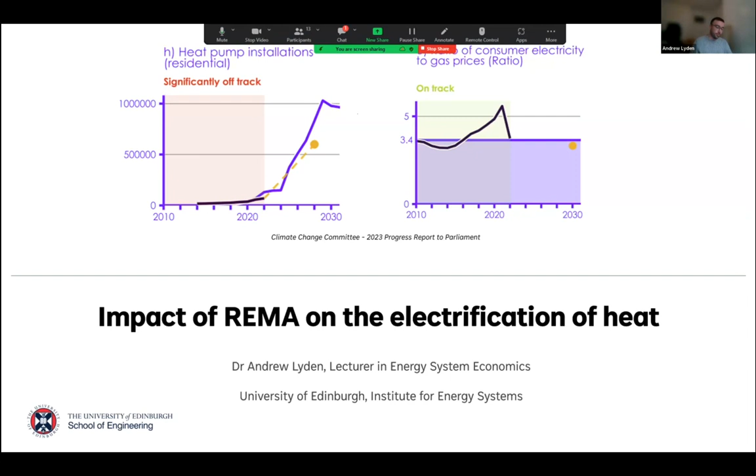So the ratio is back on track, but you can see that it could easily go off track again if government policy changes again. So this is kind of where we're at in terms of heat pump installations and electricity prices to gas, and how we can assess the rollout of heat pumps in terms of those things. I just wanted to also introduce the team as well.

So this was a project which had many different partners, and it was quite a nice experience because it was partners that hadn't worked together before as well. So it gave me an opportunity to hire a postdoc who did a lot of energy system modelling, and we had 3 co-Is from different universities.

So Stephen Watson at Loughborough University has done lots of interesting things around heat pump demand estimation. Rinaldi at Cranfield brought lots of expertise in modelling thermal systems, optimisation, understanding of that engineering policy border. And Peter Connor at Exeter University brought lots of expertise in national and local policy related to energy.

It was good to have this team together to try and start to tackle the overarching challenges that we identified in this project, which as I said, was all about the impact of REMA on electrification of heat. And so the aim was to investigate the impact of these reforms on electrification of heat, and that's really the rollout of heat pumps.

So we wanted to look at REMA and see what reforms in there might have the highest impact on the electrification of heat. Another objective was to look at different scenarios of electrification of heat, which have already been developed. We wanted to enhance the modelling capabilities of the open source power system model we have already. We wanted to be able to model these identified reforms so that we could come up with a quantification of the impact of the different electricity market reforms on the rollout of heat, and think a bit about energy policy as well.

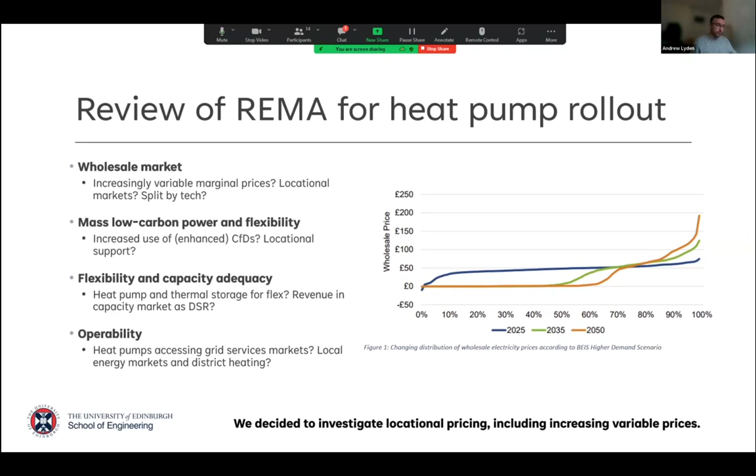Are there going to be new markets that enable this, for heat pumps to access emerging things like local energy markets and district heating, where you have larger scale heat pumps? We decided to investigate locational pricing. It was one that's fiercely debated, as I said, and it's also quite interesting in terms of the impact that it has on increasingly variable prices.

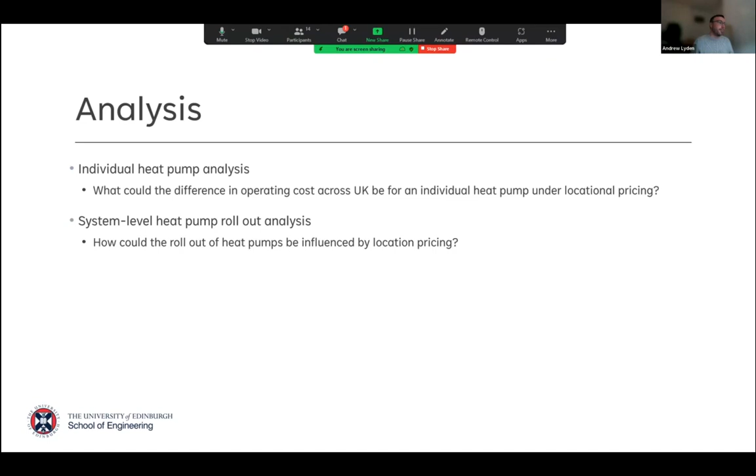So in the analysis that we carried out, we first of all looked at an individual heat pump. We looked at what would be the difference in operating costs for that individual heat pump across the UK under locational pricing versus the current status of a unified price. And then we did similar for the system level heat pump rollout as well. So we looked at, if we aggregate all the heat pumps into the different zones, what whole system impact would locational pricing have on the whole system cost.

So the first section was just individual heat pump analysis, and this gives an overview of the methods and data that we used. So we used this model, PyPSA-GB, which is an open source model for simulating historical years and future years, and it can do either unified pricing or locational pricing. As part of this project, I added the ability to do more of the locational pricing. Basically we split the country up into different zones, and we can have different prices in these zones depending on the demand, the generation, and the network connection between the zones. And this outputs wholesale prices for us.

And then we have a number of other models that we can use for things like calculating the COP of a heat pump or the heat demand of a single detached house. And then we use the Octopus Agile tariff calculation to convert this wholesale price into a retail tariff that we assume is representative of what a heat pump operator, a domestic consumer basically, would actually pay for the electricity being consumed by the heat pump.

So with this retail tariff, heat demand and COP, we can look at the different zones and calculate an individual heat pump operating cost, both under unified pricing and locational pricing. And we chose to look at the years 2020 and 2035.

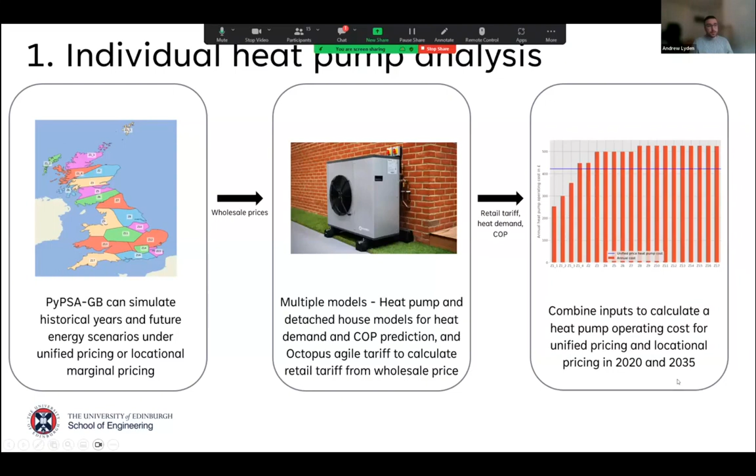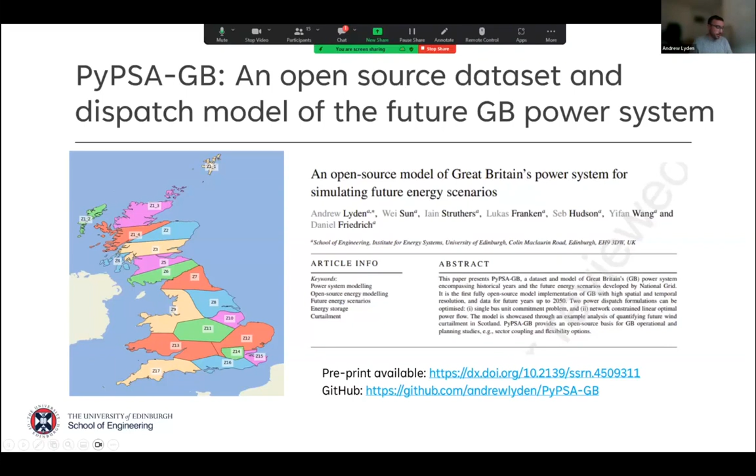So a bit more on the PyPSA-GB: it's an open source data set and dispatch model for future GB power systems. We have a preprint that's available so people can use the model. It's on GitHub. You can read about the model and see what data is out there. So do let me know if you're interested in this or have a look yourself. We've used it for other applications as well.

It was originally developed to look at seasonal thermal energy storage and how to integrate that into the wider energy system. But it's also been used for things like security of supply in Scotland and carbon impacts of increased marine generation. But for this project, we used it to develop these time series of pricing, basically, of tariffs.

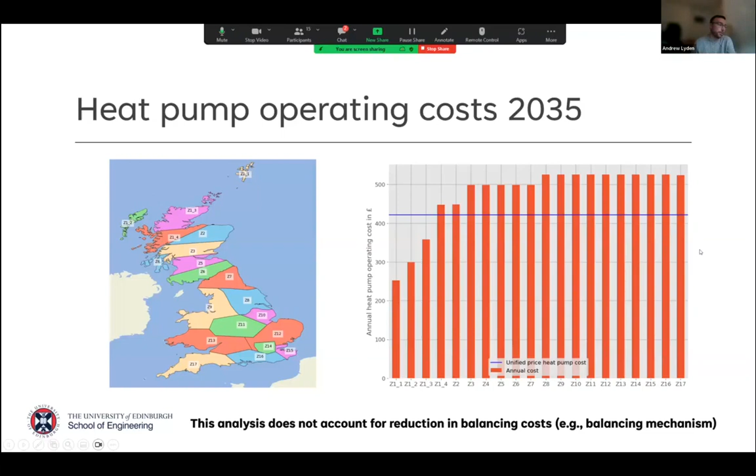So now we're seeing that the zonal pricing overall has a kind of increasing cost for individual heat pumps. And then the second part of our analysis looked at system level. So we looked at the whole rollout. We used National Grid's Future Energy Scenarios for projections in terms of where heat pumps might be and how many installations there would be for each of the zones.

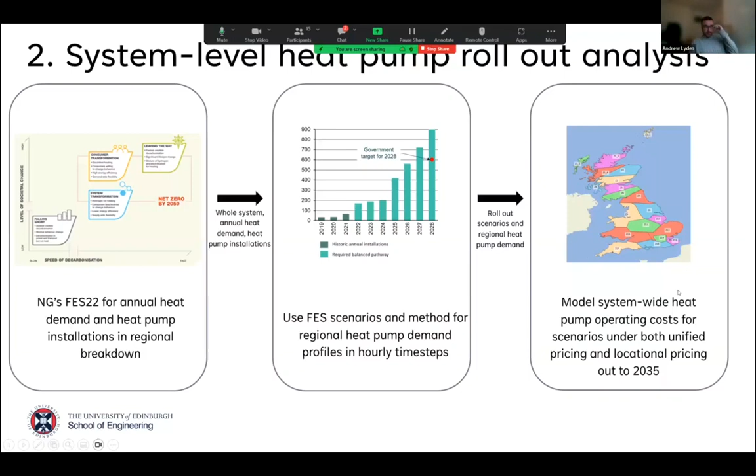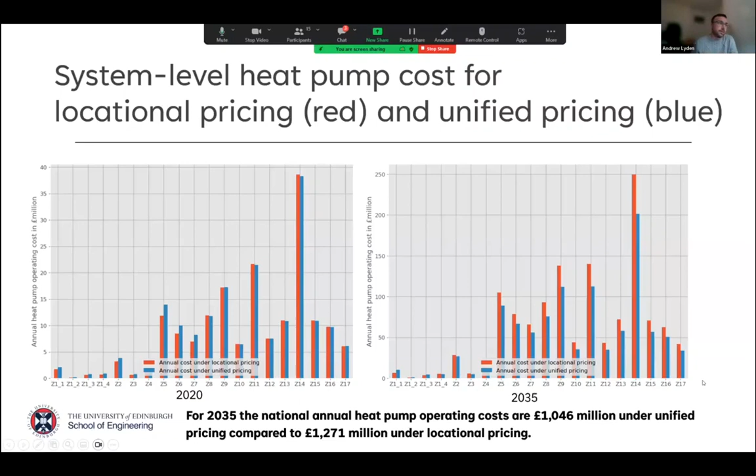So overall for 2035, if we look at a national level, if we aggregate all these zones together, the heat pump operating costs are around 20% higher. So it goes from around £1 billion to 1.2 billion when we move from unified pricing to locational pricing. So this is just based on the household costs. And we have a paper under review which goes into more detail on all these results and the things that are going on here.

And so to conclude, there's lots of interesting things that we can see that will be impacts between REMA and heat pump economics. These results that we've looked at in this short project show that there's definitely going to be some impact from locational pricing on the heat pump operating costs, both at an individual level and a system level. And there's lots of future directions that we can go with this.

I think one part that we've not really explored is this idea that locational pricing can really reward flexibility. So we probably need to include that the heat pump can operate a bit more flexibly if we've got the thermal inertia of a building or also explicit heat storage as well. How might that influence the result? A key part that we've not really included is the reduction in balancing costs that would be available from locational pricing, which I think would be quite interesting to include to see how that would pass on to consumers.

This project's been really useful for us to develop our main modelling ecosystem, and into the future, I think locational pricing could also be a key enabler for encouraging demand to locate with generation. Whilst this might not be the case for heat pumps, heat pumps will be widespread across the country. We don't have much flexibility in choosing where we're going to install heat pumps, but other technologies like electrolyzers or industry demands might have more flexibility in terms of where we locate them, and locational pricing could be a motivator for doing that. Okay, so thank you very much for listening.